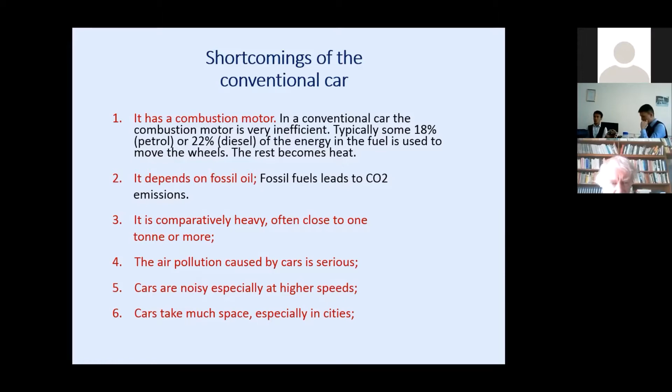As I mentioned, the mobility infrastructure is enormous in our societies. It takes a lot of place, the car. Instead of a person moving around him or herself, there is a huge thing that is a ton and several meters in every direction. So it's much, much more space-requiring than the individual. The trafficscapes are dominating in the outdoor environment, especially in cities.

There is, in fact, a movement called Reclaim the Cities, mostly young people, and they have had several campaigns. For example, they block roads in cities, and they set up places where people can meet instead. They think it's much more important that we can meet and talk to each other than being locked into a car.

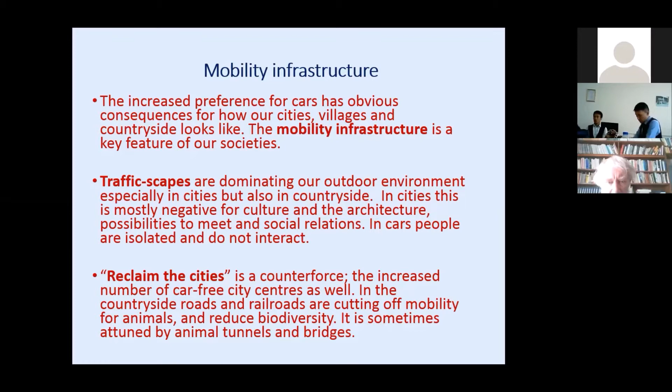We should also notice that very many roads in the countryside have serious impacts on biodiversity, because animals cannot move over the roads, or if they do, they get killed. There are some efforts to build tunnels or bridges for animals, which is an improvement.

Here you can see the difference: the car to the left takes a lot of space. In the middle, all these people are sitting in a bus, of course using much less space, or they're traveling on a bike, again much, much less space. So the car has a big minus when it comes to mobility infrastructure.

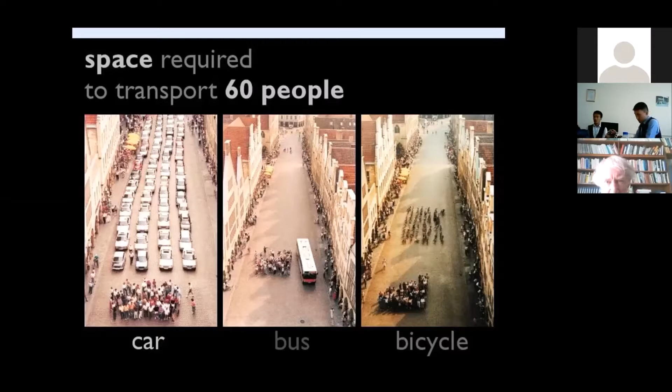Well, one alternative, of course, is public transport. Emissions per person-kilometer are drastically reduced when the bus is used, and even more so with the train or tram. And of course, traffic infrastructure - roads and so on - could be much smaller and much more efficient when there are fewer private cars.

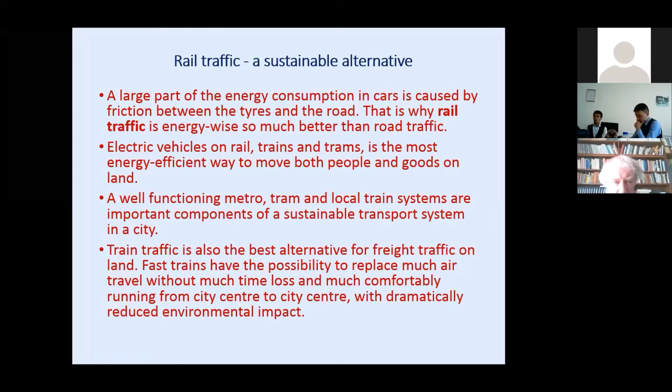It's not easy to reform air traffic, but there are some efforts to produce biofuels for airplanes, though not so very good. So in fact, air traffic has to decrease enormously, not to zero, but much. You could replace it with trains, fast trains or ordinary trains, or substitute it by using information and communication technologies like we are doing now.

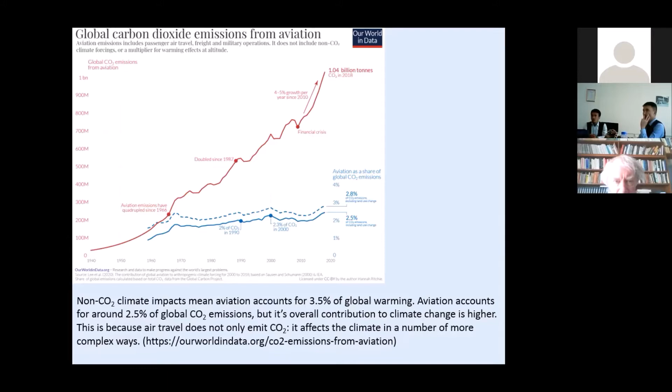Of course, last year, because of the pandemic, there was much less flying. So the airplanes were standing still, and some air companies have gone bankrupt, but most air companies have been supported by the states. But we can't go back to flying as much as we did before the pandemic. That's a very clear message when it comes to sustainable development.

Boats should be mentioned. It's expanding fast, both for business and pleasure. It has an environmental impact, but not that large when it comes to freight. So boat traffic is a good alternative for freight, but it could be improved much, both efficiency-wise and the quality of the fuel. In fact, much of it could also be using wind, even with modern ships. And ships are classically polluting enormously. That has to be regulated, and it has been regulated in the Baltic Sea, so there is much less impact on the Baltic Sea than on the west coast of Sweden.

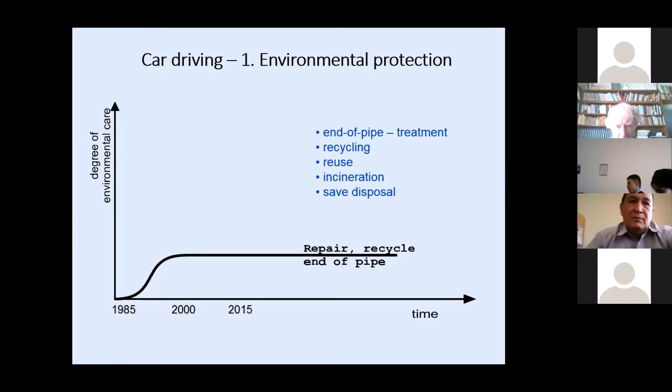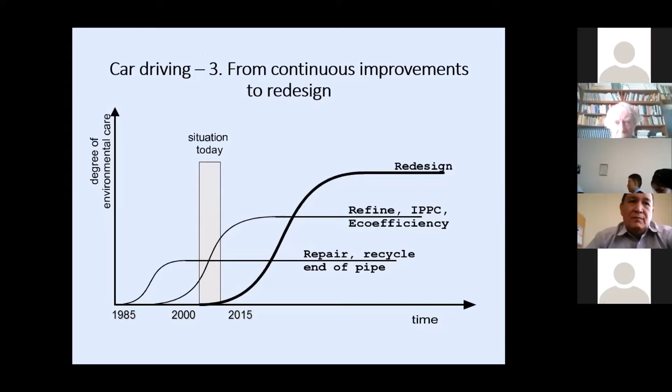The first stage was to repair the car and take care of the exhausts by end-of-pipe treatment. And of course next, eco-efficiency, cleaner production approach. Then again we had the redesign approach, a more efficient car, for example the 3 liter car, as some people say.

And then, of course, we have to rethink the meta system, the system that the car was part of - that is what we have talked much about already today. But then we didn't talk too much about rethinking why mobility - do we really have to move around as much? I can give you this example.

A friend of mine who was important in the Green Party was asked by Telia - Telia is a big company working on information communication infrastructure.

And she said, why are you using so much traveling? You could have your meeting without traveling. So this was now 10 or 15 years ago, not today with so much Zoom, but they thought, okay, we don't have to travel to New York so often to meet people. We could meet them anyhow.

So they organized a meeting room where one wall was a big screen to see what was going on at the other end, in New York for example, and the same thing on the other side. There was a table coming up to the wall where you have this screen, and on the other side it was the same thing. So it looked like they were sitting around the same table, in fact.

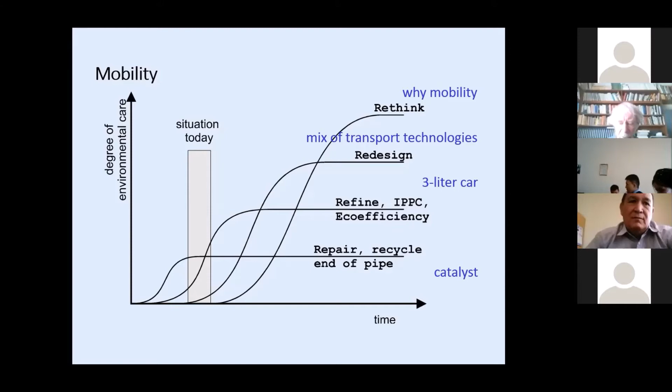The renewable fuels for cars working on biogas, bioethanol, biodiesel, and so on. Some of that might be quite good, other is not good. For example, biogas that is produced from organic waste is quite good. When biogas is produced from, for example, food waste and so on, it's rather sustainable.

Bioethanol is only sustainable if it is coming from something that is grown in the short time, that is not wood, and that is not competing too much with food or other uses of the crop. It's not considered to be a long-term solution because of the shortcomings of bioethanol.

So the one that's good here is biogas and biodiesel coming from the wood industry.

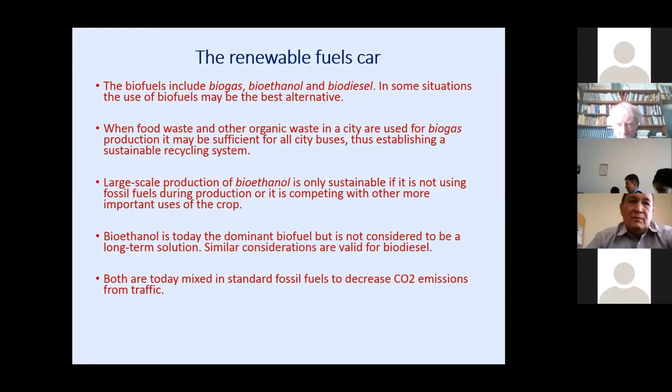Electric car, of course, is a long-term solution. Electric car is much more efficient than the traditional car. In the best case, it's close to 80-90% of the energy in the electricity that is used for moving the wheels. So it's a much more sustainable transport system.

Now, of course, electric cars may be using either batteries or fuel cells. We'll talk about both. And then there is also the intermediate system, the hybrid car. The hybrid car has both a combustion motor and an electric motor, so it can be charged and use electricity, for example, when running short distances in the city, and perhaps using fuel when running longer distances. This is often quite an efficient way to use fuel.

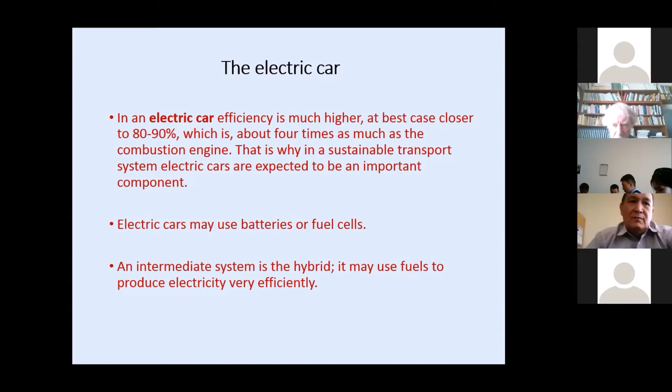So I just looked for electric cars in Sweden for 2020. In Sweden we have close to 5 million cars. 3% of them last year were chargeable, either hybrids or electric cars. Electric cars were 45,000, hybrids 100,000. But the increase in the number of electric or chargeable cars was very high, 72% per year. So in 2019, when new cars were bought, 34%, a third of the new cars were actually chargeable.

Now, the weak point here is points for charging, that is where you can charge your electric car. There are only 2,300 or so charging points in the country. It has to be very, very much more. That is being discussed very much right now.

This is last year, 2020, by month in Sweden. It's interesting to see that the amount of electric cars bought is the highest part, the dark green, and it's increasing over the year even. So there are many more, percentage-wise, electric cars bought in November than in January. It's increasing very rapidly, also in Germany, as you mentioned.

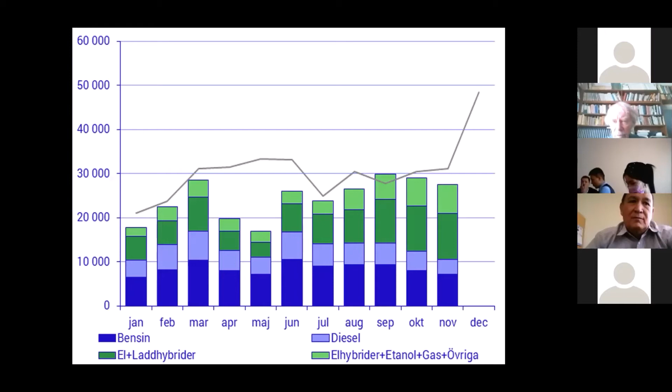These are some pictures where you see in Norway the electric cars are higher than in Sweden. Norway is doing very well when it comes to electric cars. The reason is that electric cars can use the bus lane on the road for driving, so it's much more efficient and comfortable. They can charge in many places, and they can park the car without paying anything at all.

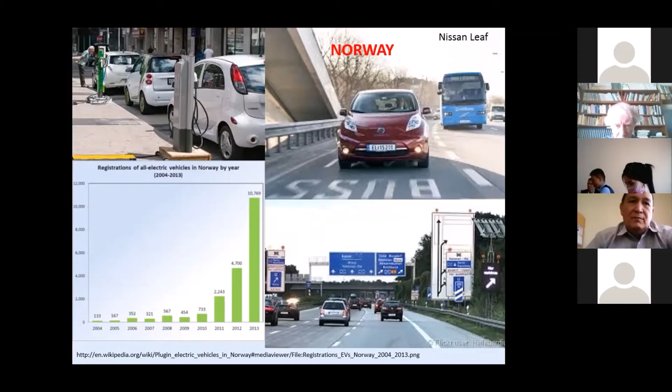So it's much better economy to have an electric car in that way. And of course, the electricity costs much less than fuel. So with petrol or gasoline you have almost 5 times as high mileage cost as with electricity, even more than 5 times, 7 times even, depending on how things are being charged.

Batteries are a key point here, and this is improving rapidly in Europe now. There are many places, but the largest battery factory is built right now up in northern Sweden by Northvolt, that's the name of the company. You see on the left side how it's going to be, and on the right side it's building very rapidly. There is an investment of $3.5 billion US here.

They will build batteries and recycle batteries that have been used for some years, and it will start producing the first batteries in the fall this year. There will be about 10,000 job opportunities, that's what they calculate on. And of course, they will use renewable electricity to run the factory. From northern Sweden, there is much hydropower and wind power, so this is an important part of the strategy.

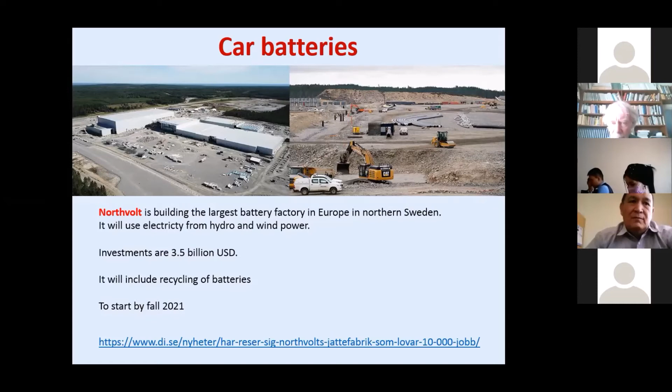The weak part of the battery right now is that batteries are produced using electricity from fossils, so this is not good, and this is going to change. Secondly, batteries are not recycled properly, and this is going to change also.

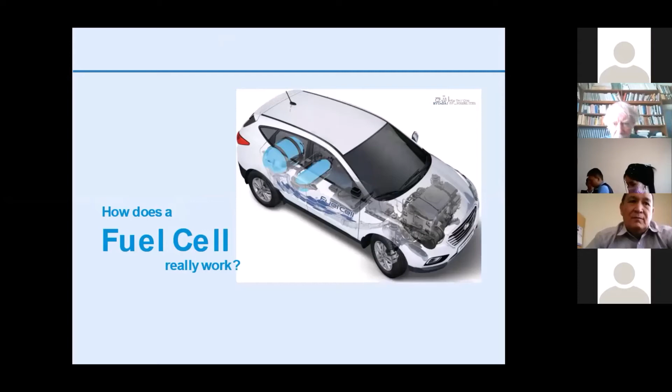It's also possible to have a fuel cell instead of a battery. So how does a fuel cell car work? You have a supply of hydrogen, or it could also be methanol, for example, or some other organic thing, but hydrogen is the one suggested. You use it in the fuel cell using oxygen.

The hydrogen and oxygen are combined and produce water, of course, and electricity. The electricity goes to the electric motor, or perhaps to a small battery. The emissions are thus water, produced from the hydrogen and the oxygen in the air. So this is very environmentally sustainable, and it's more efficient. It requires less battery, so it's a good thing.

The problem here is that in the fuel cell you need to have a catalyzer, and the catalyzer requires some important metals. But that is a system that is being improved right now. For example, platinum in the catalyzer is being reduced, so that's what we see.

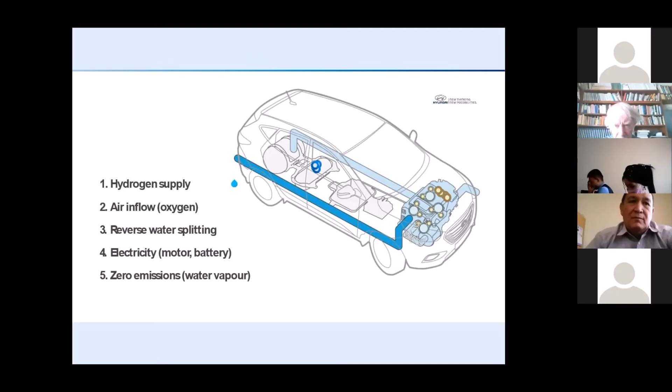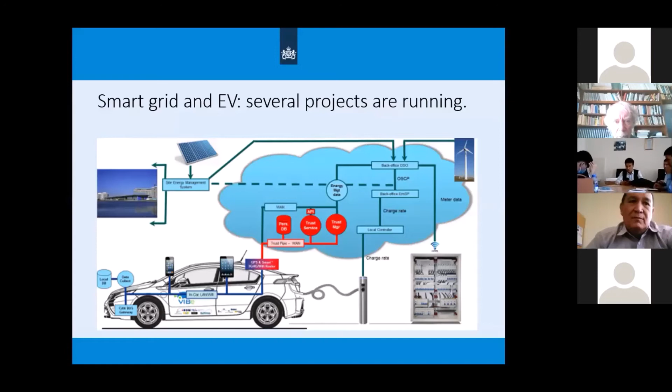And of course, you need to have a good system for charging electric cars. This is being discussed very much. You have cars being hooked up to your home, perhaps, or you have cars being hooked up to charging points in the country. So that's the technical questions when it comes to electric cars.

Now let's look at some policies that could be used to improve regulations. So regulations and taxation is on this level. And of course, the most important regulation is from the European Union, that new cars are not allowed to emit more than so much carbon dioxide per kilometer. I'll show you the figure soon.

Taxation is taxation of carbon dioxide. If carbon dioxide taxation is high enough, It is more economically good to use electric cars. So what we have here are policies that make the sustainable alternatives more attractive and the less sustainable alternatives less attractive.

This is also relevant for, for example, supporting train traffic, supporting fast trains, which takes away passengers from air travel, and of course local or national trains that take away passengers from the roads or from cars.

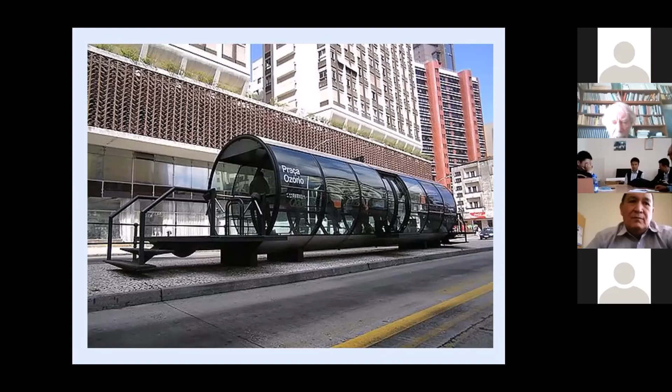So taxes, of course, is important here. Taxes can only be done by the state in most cases. So there's the tax for buying a car, the tax for mileage, insurance cost, inspection costs, and so on - there are several charges on a car. And this is, of course, important for which car you choose, or if you choose to live without a car. And the most important is tax on fuel and carbon dioxide.

The carbon dioxide emission tax in Sweden is now €0.1 per kilo, which means €100 per ton. And if everyone had this tax on carbon dioxide, we would get rid of carbon dioxide much more rapidly than is the case now. All economists working on environmental questions say that the most important thing to do is to have a tax on carbon dioxide emissions.

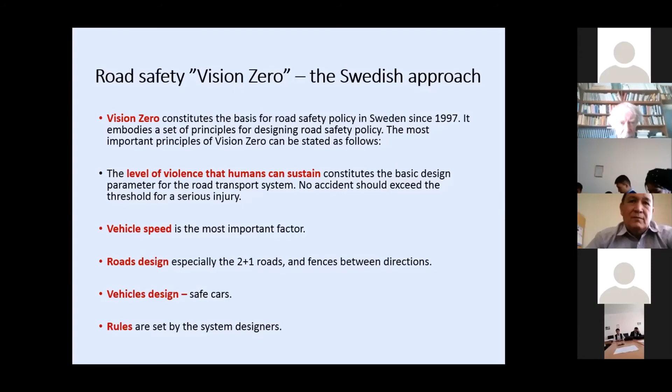There are also automatic cameras, which photograph all cars that are driving too fast automatically, and they send the picture automatically to a computer somewhere in northern Sweden, and that computer sends an invoice to the owner of the car, because you can identify them by the number on the car, and it costs quite much. These cameras can even measure how fast you were driving between one camera and the next. So they're really keeping track of you. And it has been very important for road traffic - actually, speed is the most harming factor when it comes to road traffic.

Here you can see some regulations. What's most important here to look at is regulations when it comes to speed, when it comes to car design. And then it's also important with emissions. So you should particularly look at the European Union Commission allowance when it comes to emissions.

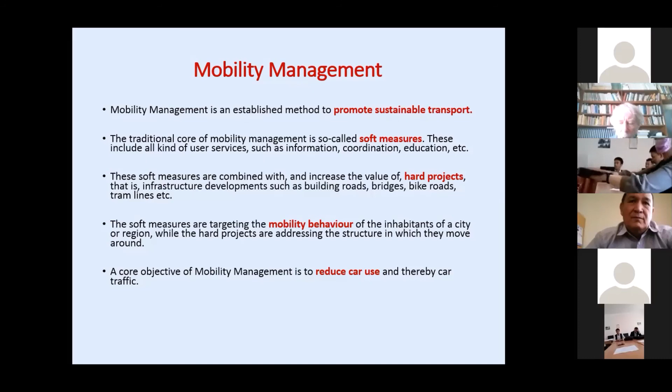These mobility management centers can have a mobility plan, deciding what to do at specific sites, such as hospitals, which I mentioned, or industrial plants and so on. How to drive to and from an industry might be important for car driving in the city. And especially they have a big job when it comes to big events like concerts or sports events and so on. These mobility centers used to have an important role.

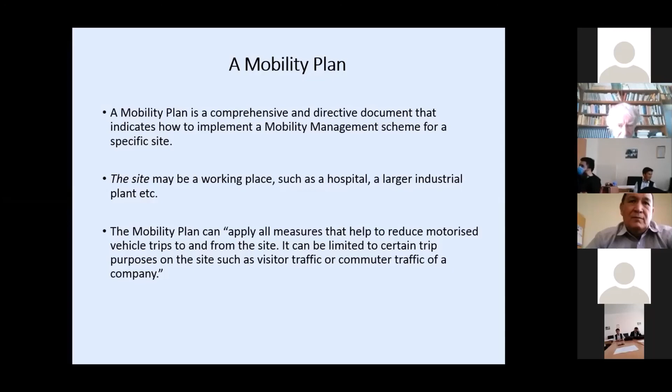This is just one example, the Mobility Management Center in Helsingborg, a city in southern Sweden. How to create safe ways to schools — so they increased the number of children who were walking or biking to school.

And then they introduced the so-called walking school bus. This means a way for the parents to take turns and walk with the kids to the school, instead of having each parent doing it independently. They also improved the physical changes in the traffic environment to improve the safety of the school. And also they had integrated traffic into the ordinary school subject — that is, the teachers in the school had to teach the kids how to behave in traffic.